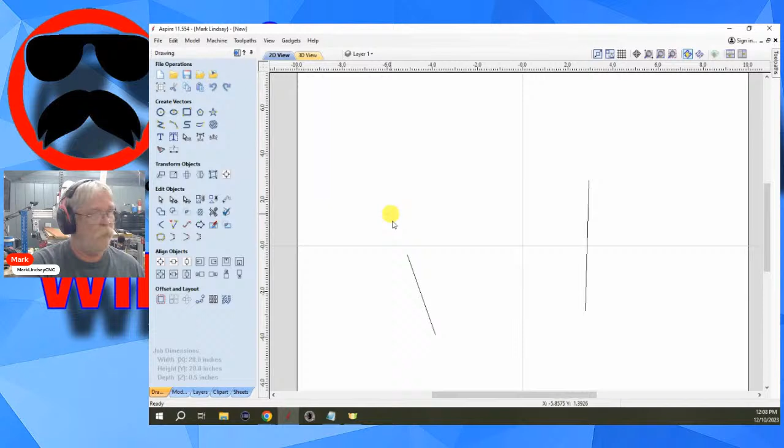I had forgotten all about the bounding box issue. Still no word on the bug. But now, today, what I wanted to talk about was some of the trim tools that don't get a lot of love.

John asks, but is it rotating at 88.5 from the angle it was at? No, it's rotating the bounding box around the vector, from that angle to 88.5.

But that's the point. At 26 degrees, if you rotated another 62.5, it will rotate the bounding box that 62.5, but not the vector. So that's something we're going to have to work with.

All right, today I wanted to get into some of the trim tools that don't get a lot of love and don't get a lot of explanation. Those are located - we all know where the interactive trim tool is, the pair of scissors out here to trim vectors in one way or another.

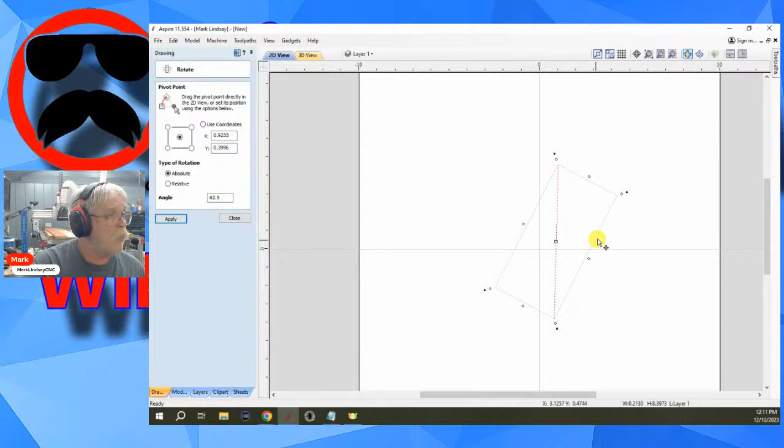So yeah, you can take whatever you're at. Now, just let me Control Z and make sure that I did that right, that was an absolute rotation - 62.5, and I didn't have relative checked. And it rotated that bounding box to 62.5.

Let's double check. I think you may have found a workaround. 88.547, that's close enough. I think that would work. So, all right, there's a workaround.

Now I know why I always use relative and never absolute. Well, whatever works for you. I would really suggest looking at selections that have more than a single straight line. You don't have to wait for me, but feel free to try several vectors and see if that works for you.

But just remember that it's rotating that bounding box around the vectors, it isn't rotating the vector itself. But as Brandon just pointed out, subtracting the angle it's already sitting at from the angle you want did work.

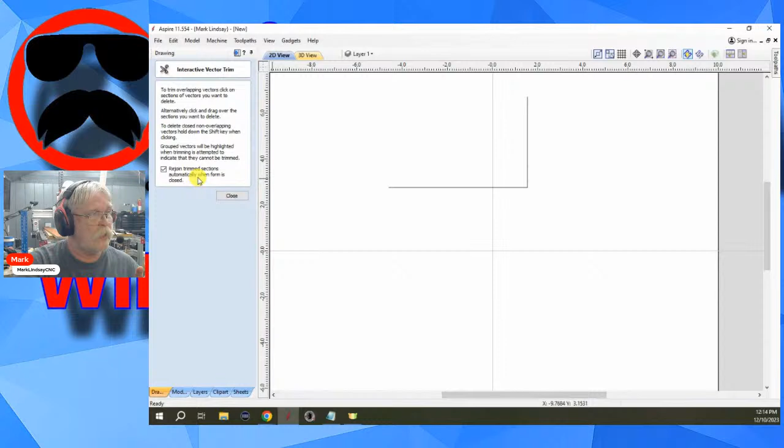Now, if I want to trim this vector to this one, I can just trim down here. Because I have this box checked - rejoin the trim sections automatically when the form is closed - since I've trimmed away this vector out here and this vector down here, it's going to join these two into one open vector. I'll click close. Now when I select this out here, it selects the whole thing. And if I go into join vectors, we can see I have one open vector - it did take those two separate vectors and joined them.

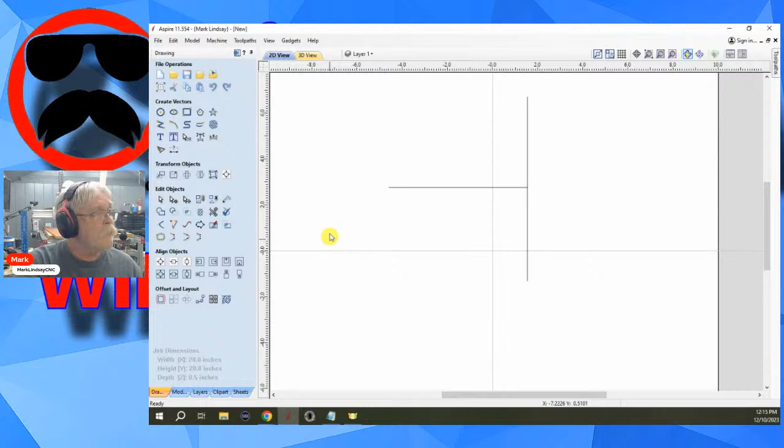Now if I Control Z that last cut and select them both, we can see I have two open vectors. Again, you cannot join one vector to another unless you're at a start point or an end point.

So that's the most basic trim tool that most of us are familiar with. But now we have all these over here.

You may or may not be familiar with the weld tool. Welding comes in real handy when you're working with script fonts, and you want to connect letters together so that it looks like it's all one piece rather than separate letters. That's a good case for a weld tool.

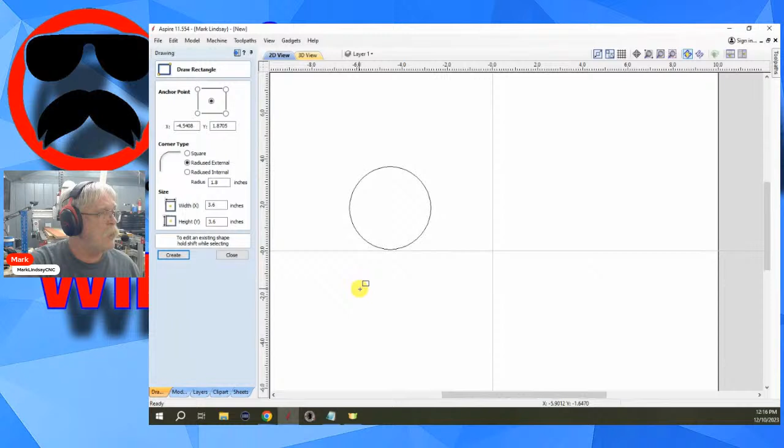Let's use their diagram here, and let's go for a circle right about here. And we'll go for a rectangle. No, that shouldn't have been selected. We'll go for a rectangle. Let's just go ahead and create that.

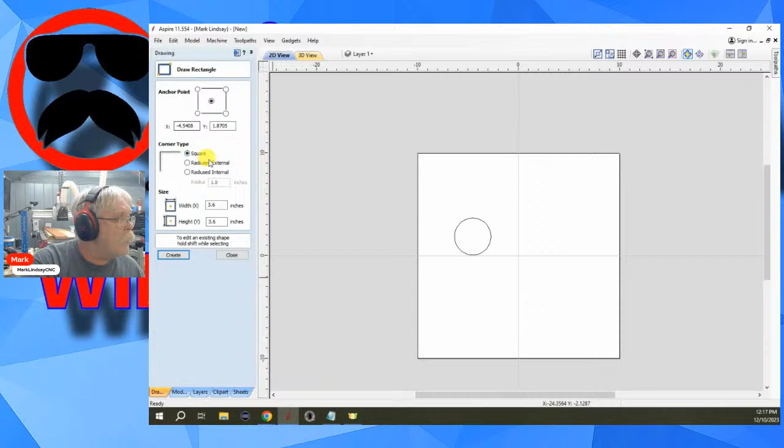Where did it put it? Let's create whatever that says. Close. I don't see the rectangle. Where's the rectangle? I want to go with a square, 3.6, 3.6. We'll create it. There we go.

All right, but now I want a little bit of an overlap here, and I want to weld these two together. Well, what I can do, I can take the scissors and I can trim that away.

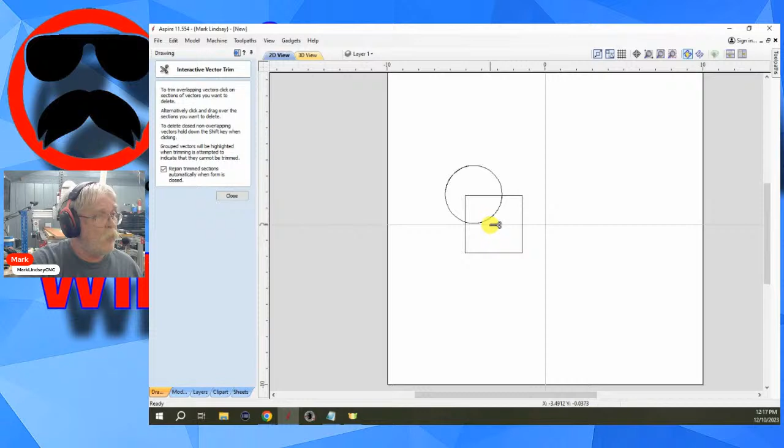What happened? How come I've got more than one? Somehow I ended up with more than one circle out here. Okay, let me clean up my mess here.

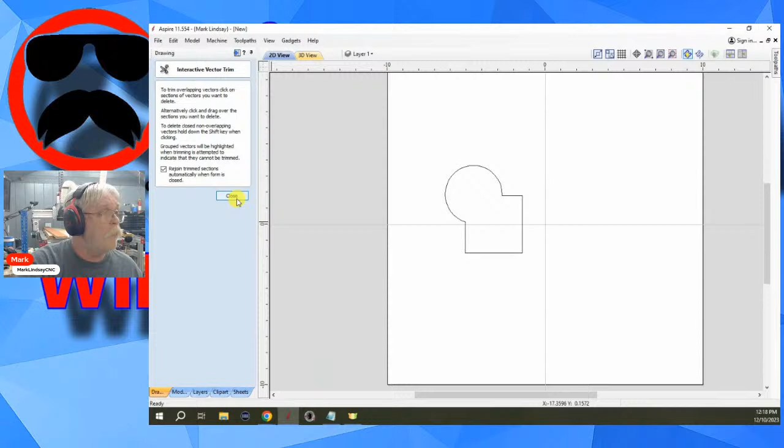There. All right. Now I can take my scissors out here and I can trim those away. And that's real easy, and it's already joined. Or close, Control Z, Control Z, Control Z.

Or I can just select them both and weld them, and that will do all of that for me with one click. Okay.

That's, again, whoops, Control Z. That's pretty useful when you're talking about using script fonts to attach them all together so that it's one continuous piece and not a bunch of letters connecting, laying over the top of one another.

And that's fairly common, but we have 3 other trim tools that are not very common. And that is subtract and overlap.

Now I'll get into those in a second, because I wanted to go to another one that I have found very useful, and that is trim selected objects to the last selected object.

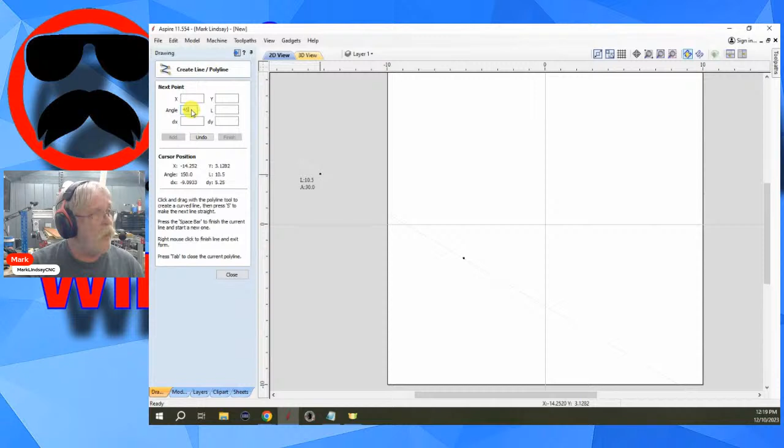So for that, let's play around a little bit here, and I'm going to do a start right there. And for my next point, I want an angle of 45 degrees, and I want the length to be 4 inches long. And I'll add, so I've got my line here. It's a 4-inch line at 45 degrees.

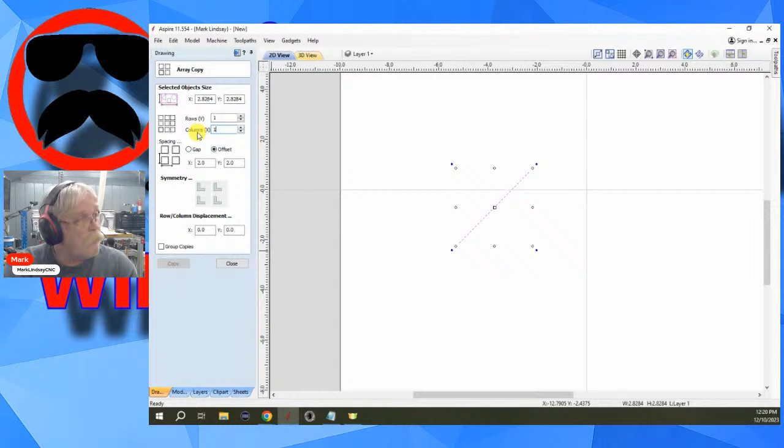Now I want to copy that on a linear array, so I'll select it and come over here to Array Copy. I want 1 row in Y, but I want 10 columns in X. I want 10 lines across. And I'm going to go with an offset of a half inch, so 0.5 and 0.5. Actually, I don't need anything in the Y, but this'll work.

And I want to group the copies just for this demonstration. Now I'll back out and I'll copy. So now I have 10 lines spaced a half inch apart. I'll close that.

Now I want to copy these. I want to make a copy of this group, flip the other direction. So I'll come over here to my mirror tool.

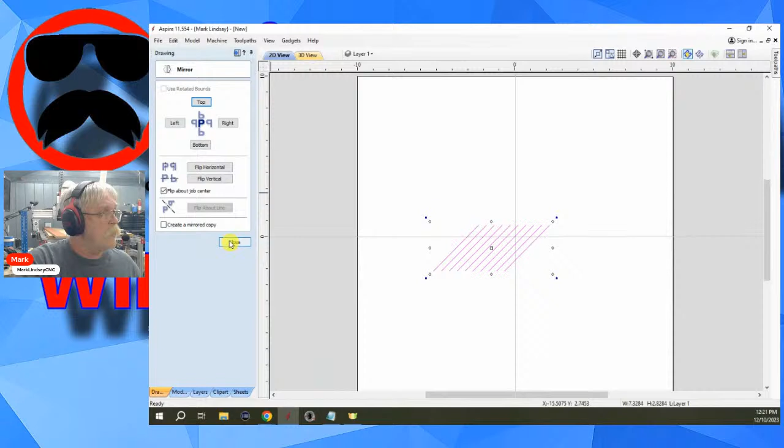And I don't want to flip it about the job center. Yes, I do. Let me close this first, and I'll select these, and let me center that up.

There we go. Now I do want to flip it about the job center. Nope, not rotate, mirror, wrong one. There we go. I want to flip it about the job center. I want to create a mirrored copy, and we'll just flip horizontal. Close that. So now I have this crosshatch pattern here.

Now let's take my measure tool, and I'm going to come up here, start right there, and I'm going to come straight down. What is my measurement there? 2.82 inches. Okay, that's fine.

I'm going to make a 2 1/2 inch circle right in the center. So we'll go over here to my draw a circle tool, and I will go, I wanted X0, Y0, and I want it to be, what did I say, 2.5, 2.5. And I'll create that circle.

Now what I want to do is I want to trim all of these vectors away outside here, but I want these vectors left inside the circle. So what I'll do first of all is I'm going to select both of these groups, and I'm going to ungroup them so that I have separate vectors.

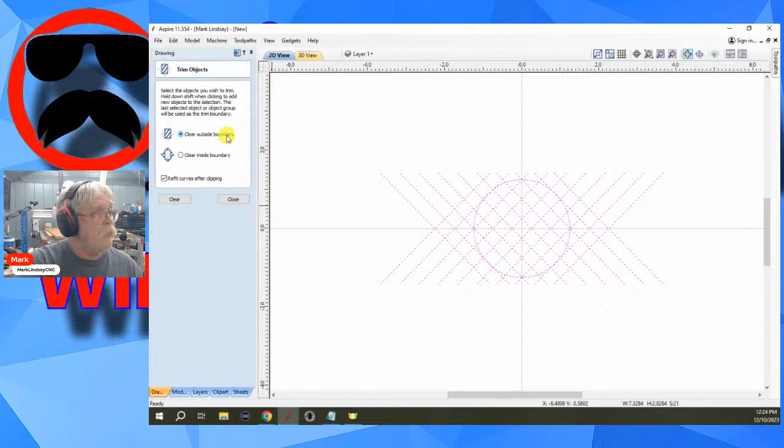And I want it to refit the curves after clipping. So I'm going to clear outside the boundary, and I'll click clear, and it trimmed all of those vectors to this outside boundary.

It's a one-click solution. This is a very easy way of adding a little bit of detail. Okay, AL Peleg is asking, won't it work when they are grouped? Well, let's find out. Let's see if it will work.

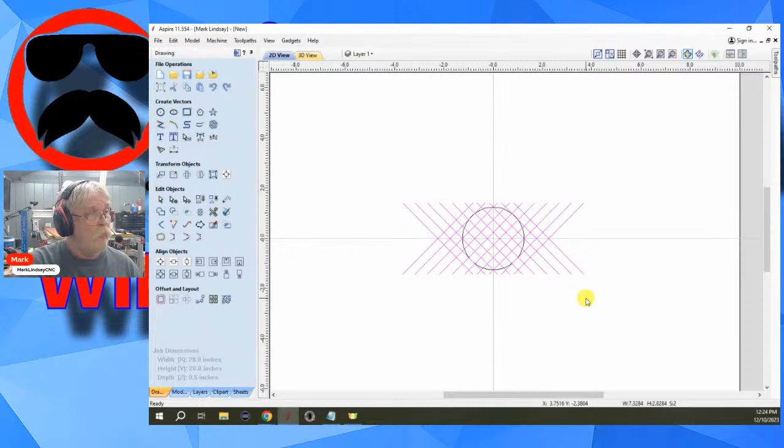So I'll Control Z, let's go back over here. Control Z the trim, Control Z the ungroup. So now I have these two grouped. See, I normally don't work with grouped vectors. I'll hold down Shift, and now let's go look.

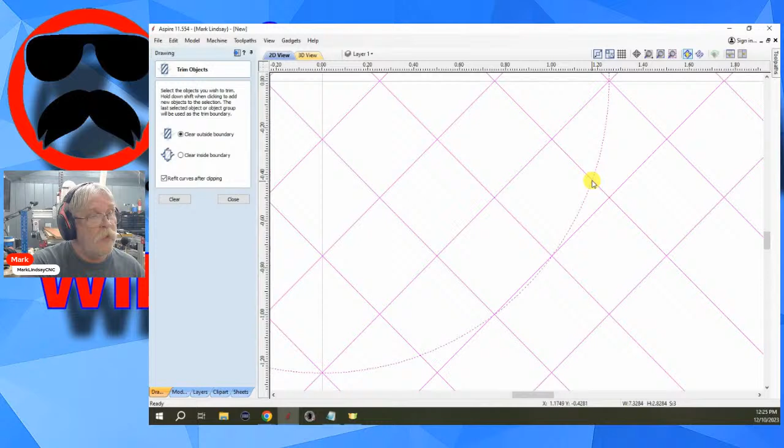We'll clear the outside boundary. What the refit curves after clipping does is, if any of this is joined, it will refit that join and make sure that it is joined after the clip. So for instance, if these were joined squares, after they are trimmed to this vector, like right here, let's focus right here. If this was a joined square, after the trim, it would project the vector along this to join this and make this a complete closed vector. That's what the refit is.

So let's see if this will work. And it did work. It automatically ungrouped them. And again, you can tell that simply because they're dashed lines, they're not solid pink lines. So now if I want to group those, I can go ahead and tap the letter G on my keyboard, and now they are grouped. So if I click off, I can come back and select just one.

And it selects all of these vectors. Generally, I don't like to work with grouped vectors because there are some actions that can't be performed on groups, right?

For instance, just a simple for instance, if I'm looking for open vectors and I come up here to selection, select all open vectors. Oh, okay, it did it in the group. Wow, that used to be a big thing. If you selected all open vectors and it was in a group, it would tell you there were no open vectors. Evidently, they have since changed that. So now it will tell you when you have open vectors within a group.

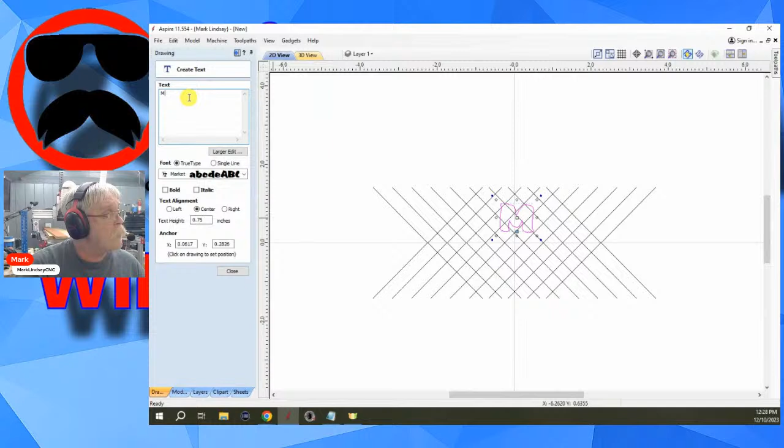Let my font list load, I've got an extensive font list. Let's go with Market. What the heck? And I'm just going to put my initial out there, capital M, close, and now I'm going to resize that.

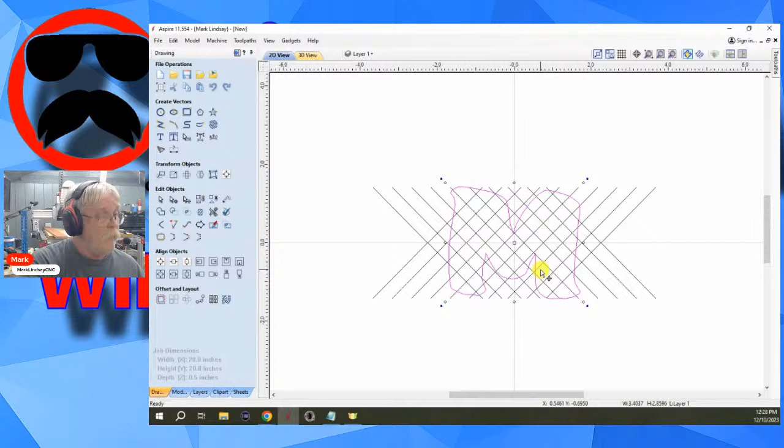Bring that down. Oh, nope. Come on, you can do it. There we go, bring that down inside. Yeah, there we are. And now it's a little bit too big, it's going outside of our cross hatching. And we'll center that up in the middle. That looks okay, it's got everything all set.

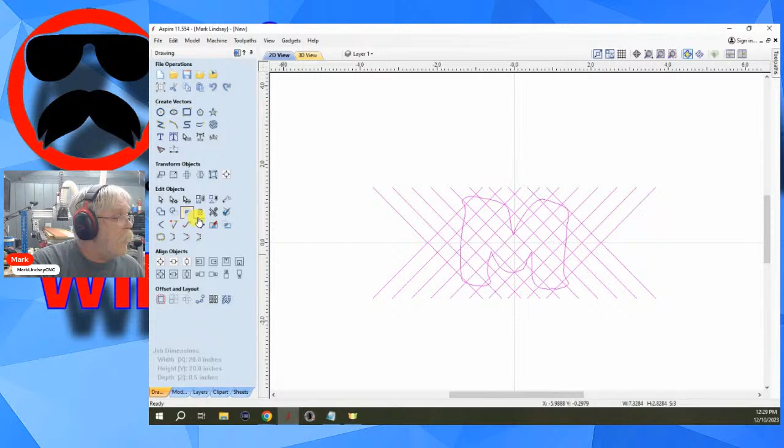So now I can select these, hold down Shift, and I can trim everything outside of that, refit curves after clipping, and clear. So now I could come along with, say, a 15-degree V-bit and clip and carve very shallow, and have that little extra detail within that letter M. So, okay, that's just one example.

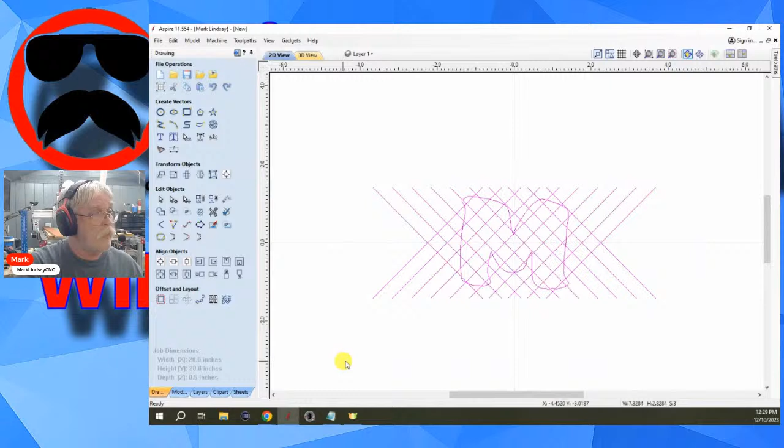Let's see, now we have the subtract, let's play around with that a little bit. Let's delete that, we don't need that anymore. And I'll zoom back out here. Let's say for giggles, I'm going to do overlap first, because when I go to do subtract, I'm actually going to design a piece that I will be cutting. Not today, not on the live stream, but I will be cutting it eventually.

The overlap, let's say you want to create a circle out here that is 4 inches in diameter. Create. But now you want to split this into 4 quadrants. It's easy to come along here and draw a vector, spacebar to accept that line, come over here and clip and spacebar.

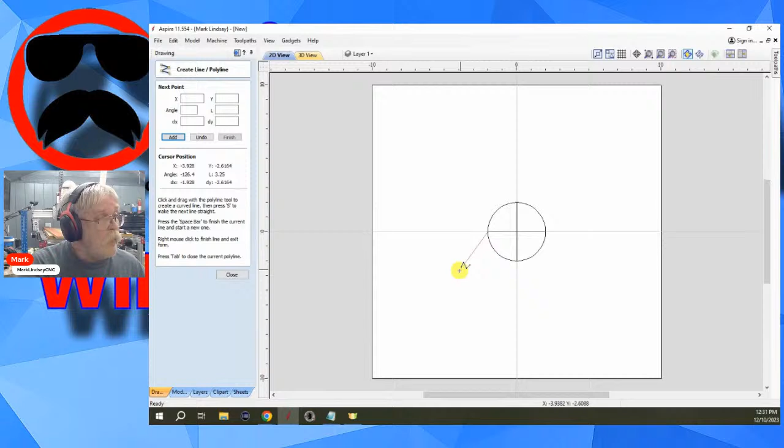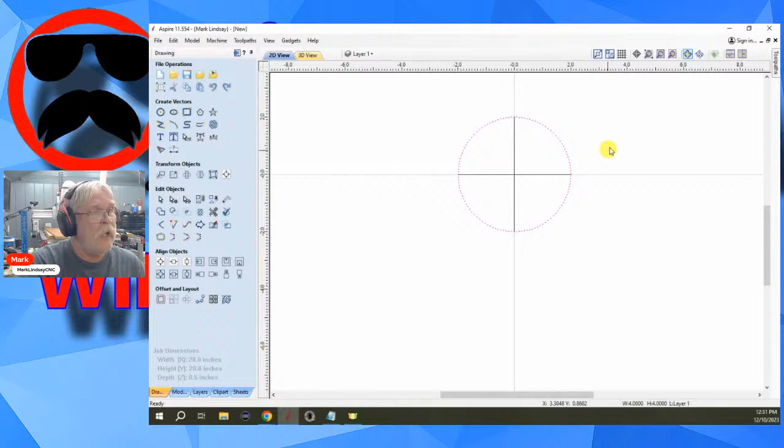But you have a drawing of 2 vectors within a circle, but that's not making this into 4 separate vectors. Now, yes, you could...

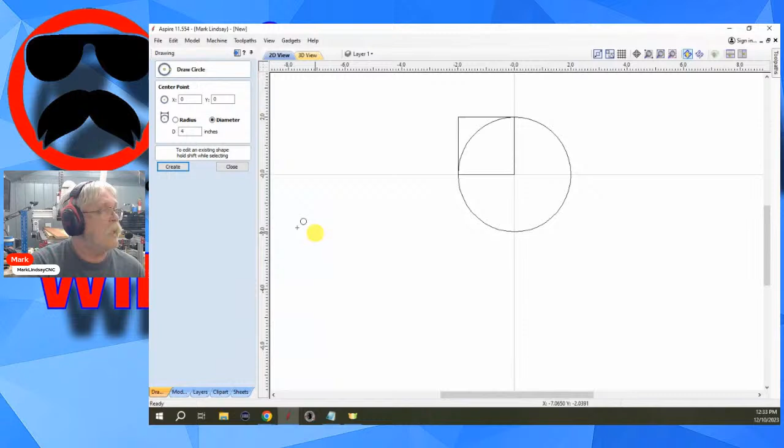All right, so I've created a 4-inch circle. Excuse me, they said there'd be no math—they lied. Okay, so what I have is an overlap: a 2-inch square and a 4-inch diameter circle. This 2-inch square represents 1 quadrant of that circle. Now where these two overlap, this area right here, that's the quadrant I want to keep.

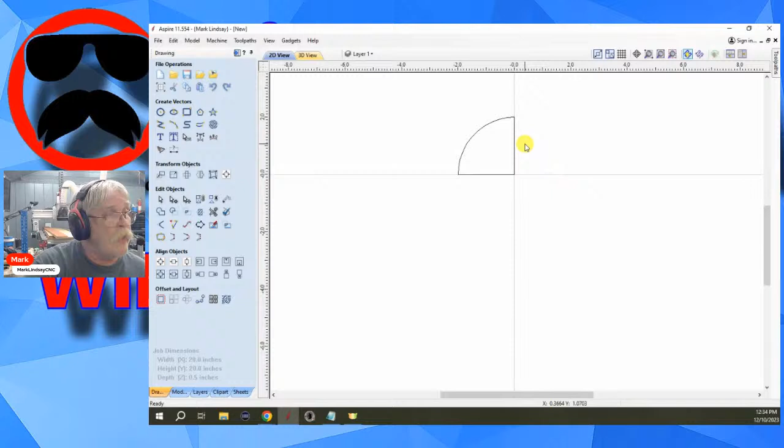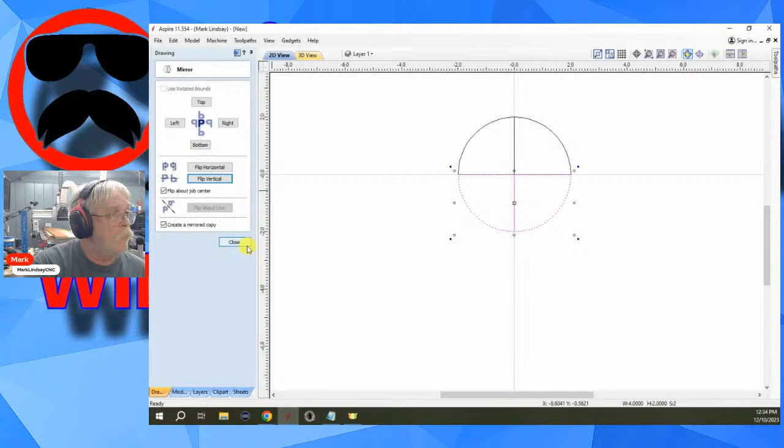So I'll just select both of those vectors, come down here to 'keep an overlap of the selected vectors', click on that, and there's my first quadrant made. So now all I need to do is select it and mirror it. I'll want to flip about the job center, create a mirrored copy, flip horizontal, and now I have half of my circle. Select them both, no changes to my settings, flip vertical, and there is my 4-inch diameter circle split into 4 quadrants.

Venn diagrams for everyone in vectors, no less.

Yeah, well, there you go. It's a simple way of, let's say, if you wanted to V-carve this quadrant and that quadrant, and make these an epoxy fill in blue. So you have this color or this one, and you could V-carve these to a flat depth of 1/8 of an inch, or about 3 millimeters, and pour those blue.

Then you could select this vector, hold down shift, select this vector, and V-carve those down to about 1/8 of an inch and pour them white. Then you could select all of the vectors, put a 30-degree V-bit in it, and have it cut down on a profile toolpath to about 1/16 of an inch deep, 1.5 millimeters, carving on the vector, and pour that black. And you would have a BMW insignia.

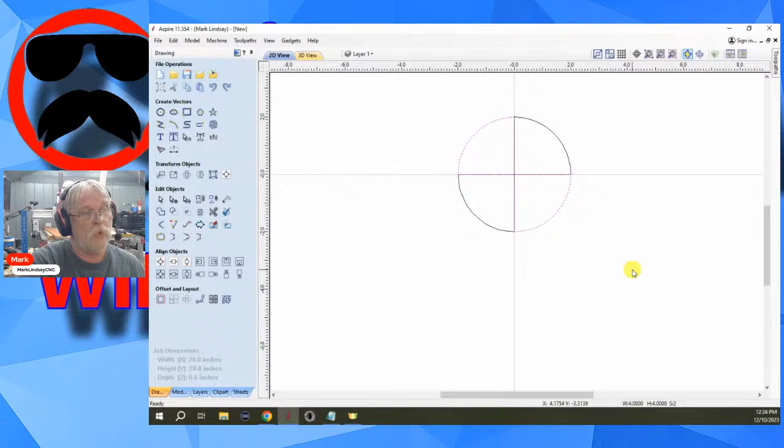So there's that. It's an easy way of using the overlaps to create a quadrant of a circle, and it doesn't have to be a quadrant. But if you were attempting to do something like that, it would save a lot of making extra layers. Now, personally, I would put these all on separate layers—maybe the two that I was going to carve blue, I would put on a separate layer from the ones I was going to do white. But that's where we just get into organization. It's making the separate vectors without having to go in and do a lot of unnecessary trimming.

Now, when it comes to the subtract, it's also a very simple operation to do. But I've decided that what I'm going to do is go ahead and actually design a pattern. I'm going to create a tool.

You probably can't see, but back on the CNC router, because they're both white, I have a 20-inch by 20-inch piece of 1/2-inch thick HDPE—about a 12-millimeter thick piece of HDPE plastic that is 20 inches square, about 508 millimeters square and about 12 millimeters thick.

Now, what I want to do is make a caddy that'll fit down inside of my pressure pot. I've got this big old 10-gallon pressure pot where the top opening is 17 3/4 inches, which is—let's see—17.75. That's about 450, not quite 451 millimeters wide.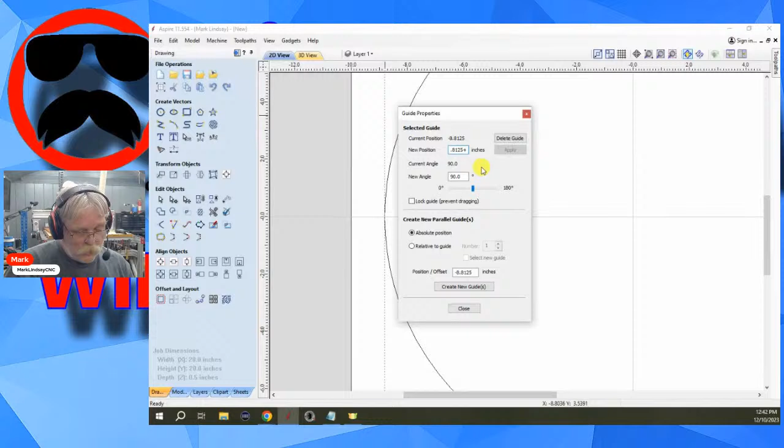I'll right click on that guide — its current position is -8.8125. I want to add 2 inches to that, so the guide moves 2 inches in from where it is. Under new position, I'll click in that box, cursor after the last number, say +2, equals, and it gives me a new position. I'll click apply. That guide has moved 2 inches in to the right — it's a positive number because it's moving right.

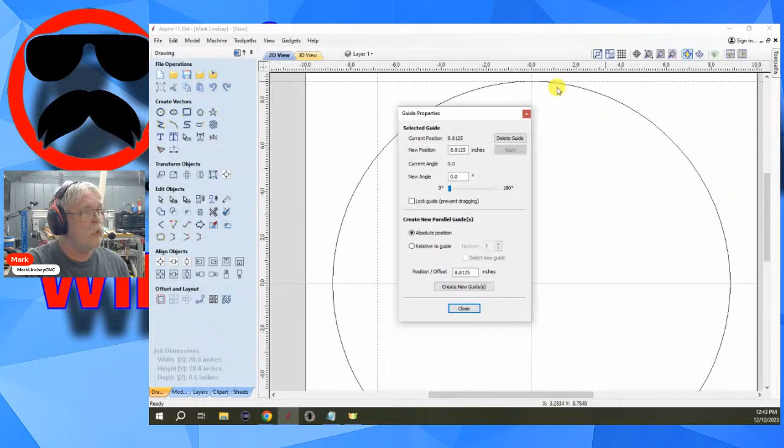Similarly, I'll come down here and put a guide right there. I'll right click that guide, and now I want to move in the negative direction, so I'll do the same thing except say -2, equals, it gives me a new position, click apply, close. Now I have a guide 2 inches in from this end and 2 inches in from this side.

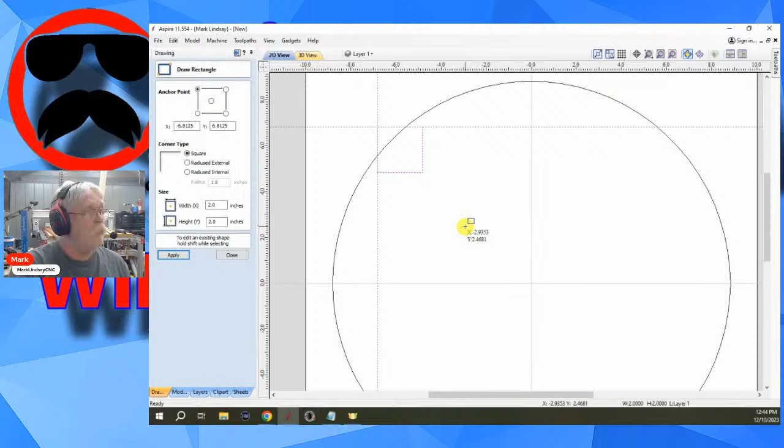So now I'm going to draw a rectangle. I want to anchor it at this point, the top left corner, and make it 2 inches by 2 inches. I'm going to click right there — now that just clicked.

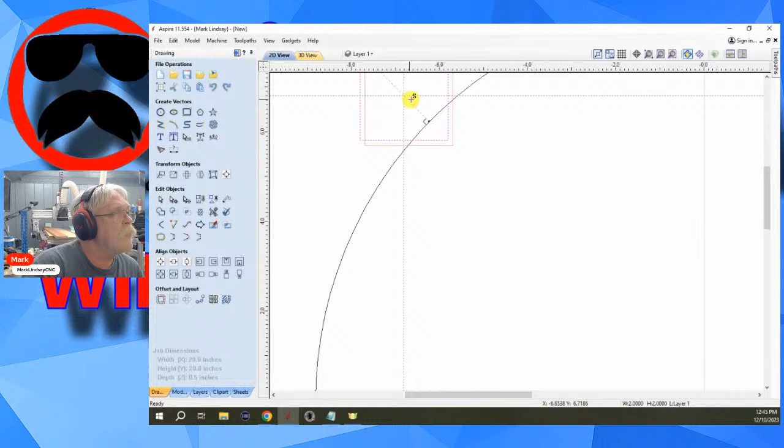That may be too much — or not enough rather. No, I don't think I like that. I don't need much more than 2 inches, however, so maybe I didn't need those guides. Let me drag it out that way — that's not enough. Let me move it to where my center is on that guide... that's not enough. I think that's about right. So I didn't need those guides after all.

Let me scoot this over so that it just about splits — there we go, that's about right there. So let me delete that guide, I didn't need those guides.

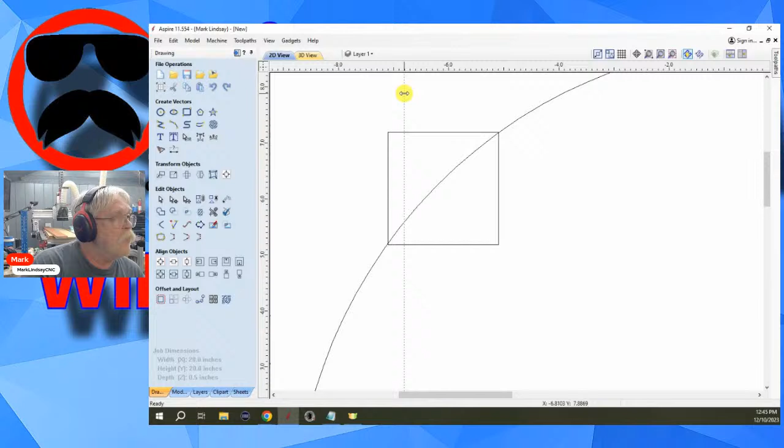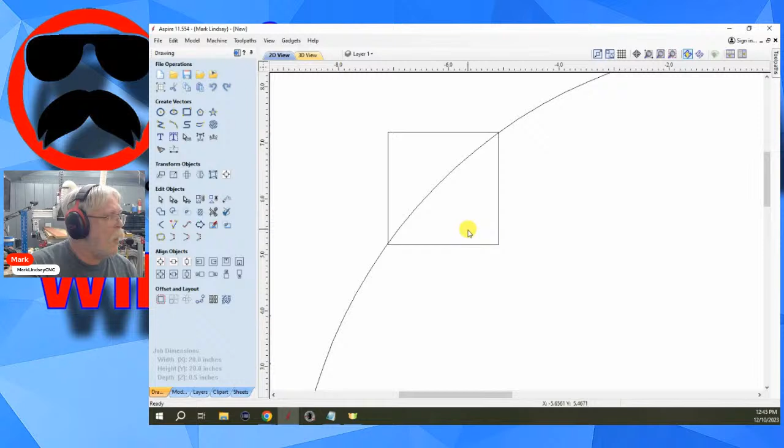Delete, okay. Now I made that square with square corners, but now I want to fillet this corner because I want a nice radius here. I'm going to be cutting this out with a 1/4 inch bit, so I want to put a 1/4 inch fillet. Let me change the radius of my tool to a quarter inch — where'd the 8 come from? Must have hit two buttons at once. I want a normal fillet, and I'll come down here and do that.

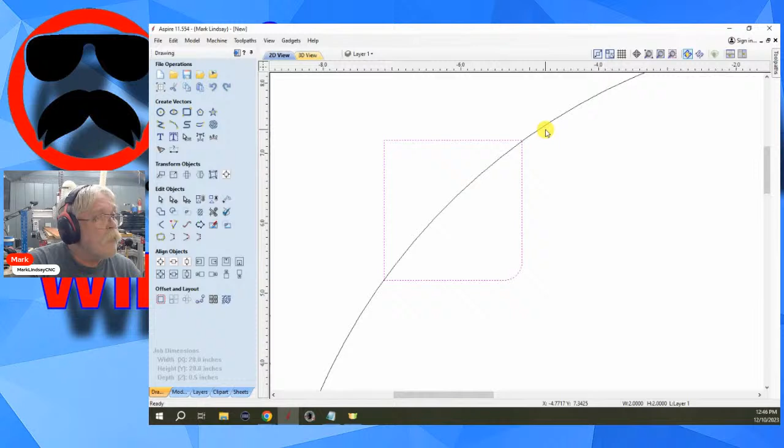I've got something bothering me here — yeah, that's what I thought. Let's scoot... come on, scoot... and that's fine, okay. So now I've got that one rounded corner. I've got my circle, I've got my square.

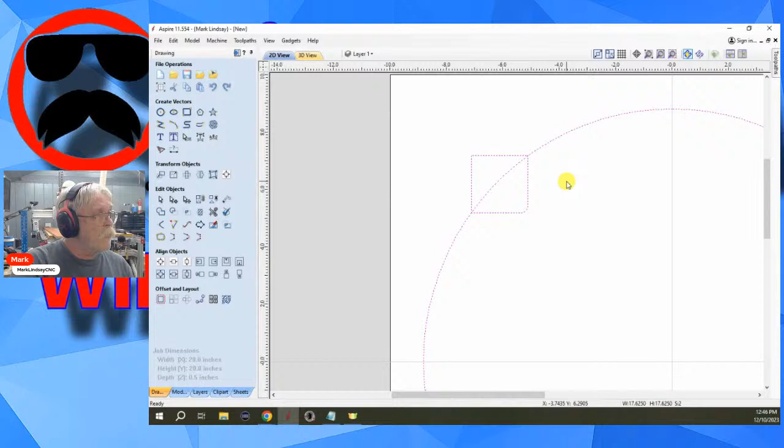So now I want to subtract this from this. I'll come over here — nope, that's the wrong way. I want to select my circle and subtract the square from it. So select my circle, then select my square, then click subtract, and there we go.

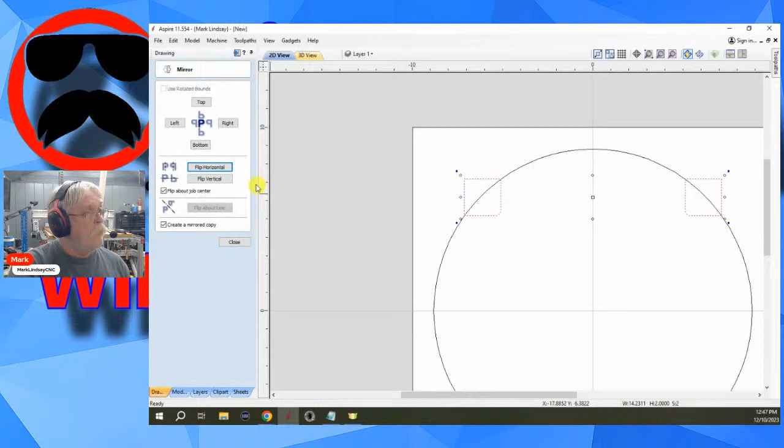So that's the first one, and this is what happens when I go live. I need to Control Z that because I need one on each corner. Let me create a mirror copy, flip about job center, flip horizontal. There's one there. Select them both, flip vertical. Now I have 2 down there. Now I can subtract.

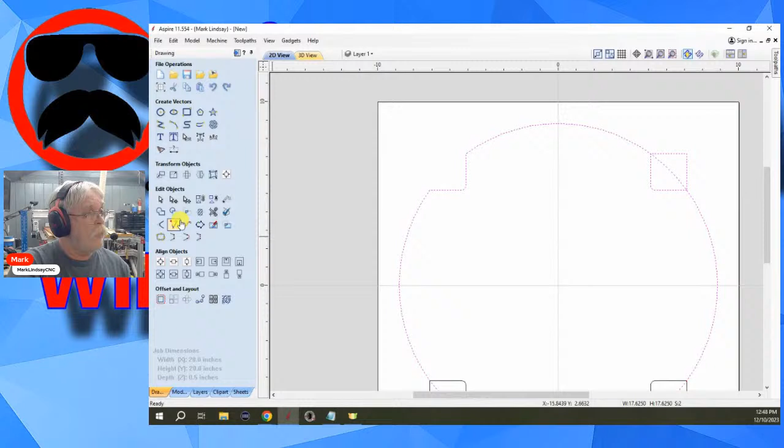Now, the instructions on the subtract tool are specific. I can't select the circle, then select all of these squares. What I can do is select the circle, then subtract the square from it. Then I have to select this square and subtract from it. Then hold down Shift, select that square and subtract from it. Hold down Shift and subtract from it. Now I have my 4 cutouts.

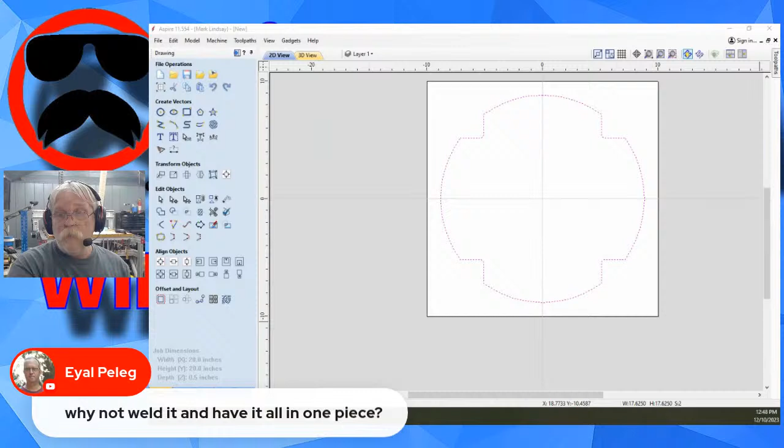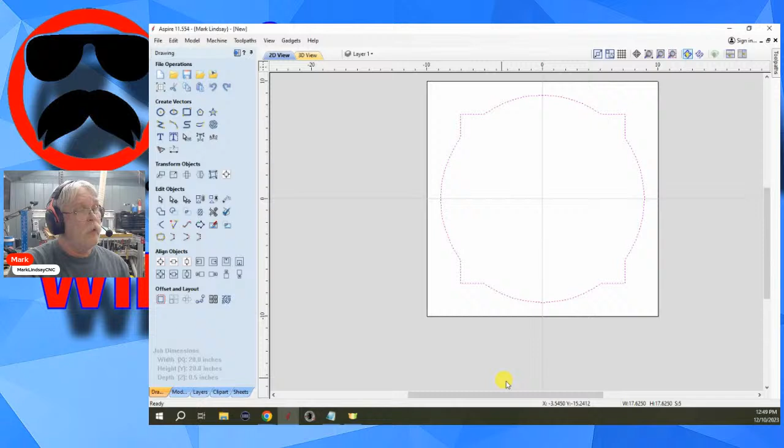Now, Eyal is saying, why not weld it and have it all one piece? That is one piece. That is one closed vector. It is one closed vector. Now, to your point, however, let's Control Z all of those. Now let's select everything and let's weld. That's why. It doesn't know what you want to weld. It doesn't subtract the one from the other. It groups them together based on the outside.

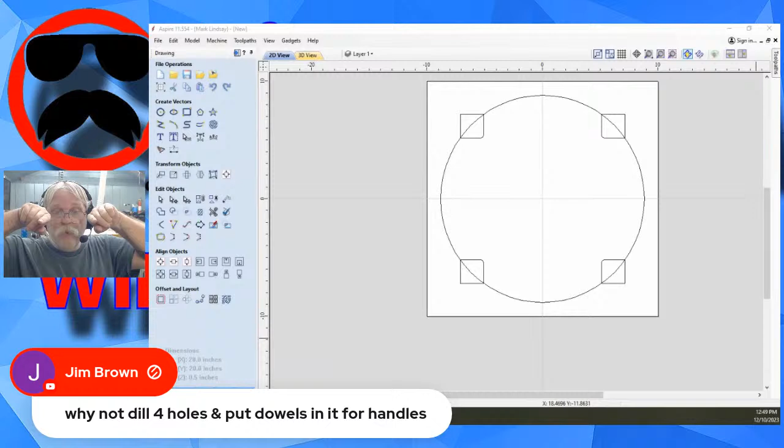So we'll Control Z. And now let's see. Why not drill 4 holes and put dowels in it for handles? Because then I've got to somehow attach the dowels to the HDPE. And I don't know if you've ever tried to glue anything to HDPE. Doesn't work. And I don't have a flat bottom.

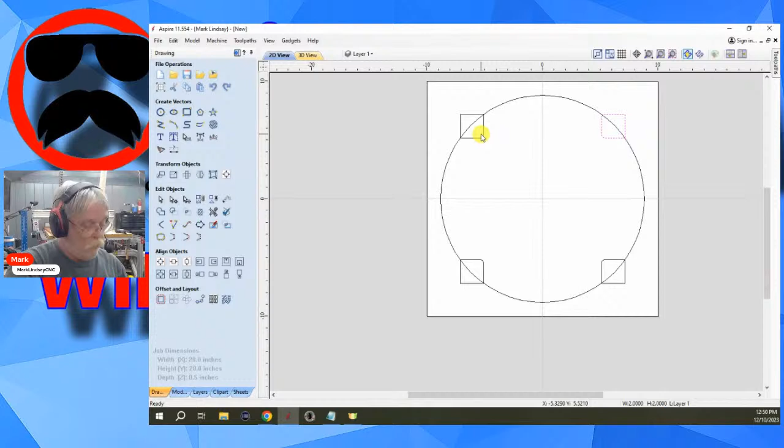So let's see. No, I wasn't trying to add them, Eyal. I was trying to subtract them. Yeah. Now, the suggestion there is to group all 4. And we'll grab this one and that one. Let's group them. And we'll take this circle, hold down Shift and select the group, and we'll go down here to subtract, and it does work. Okay, you can subtract the group.

All right. Now, let's see, do we still have one closed vector? We do. Okay, so you have one closed vector. Yes. So yes, that will work, guys.

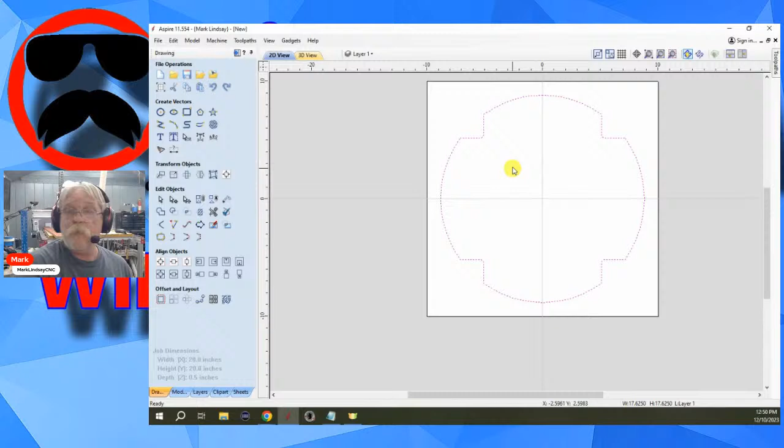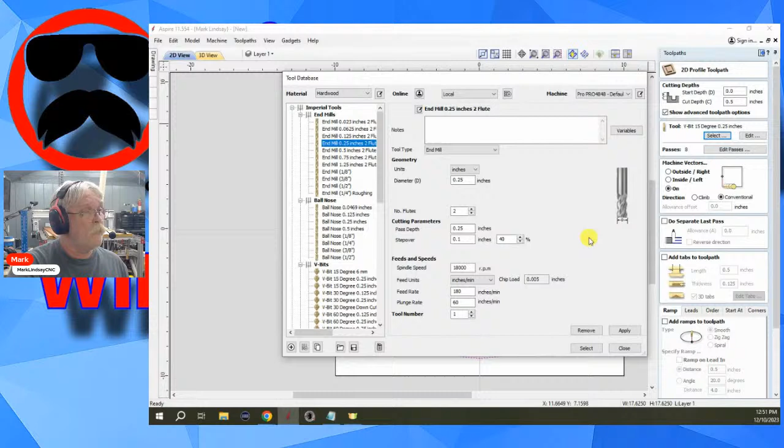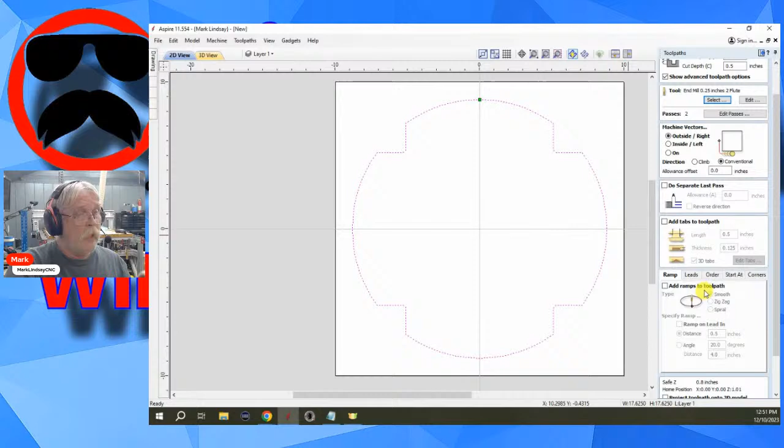Great. So now what I can do is I can cut this out, go over, and we'll just select that, do a profile toolpath. I want to cut all the way through, Z equals, and I want to use a 1/4 inch end mill. And I'll select that. I want to cut to the outside. For this, I'm not going to do a separate last pass. I will add tabs, but not for this demonstration. For this demonstration, I'm not going to add the tabs. Won't use any ramps or leads or anything.

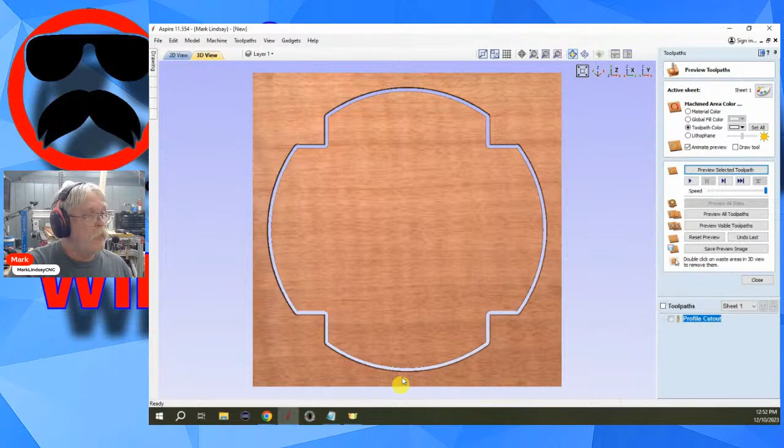And I'll just call this profile cut out. Calculate, and I'm going to change my material. Well, no, I'll go ahead and leave it that just so you can see it. I'm not going to play around with it. I was going to make it all white, but no, not going to worry about it. Now that'll cut that out, and now I have a tray, a caddy.

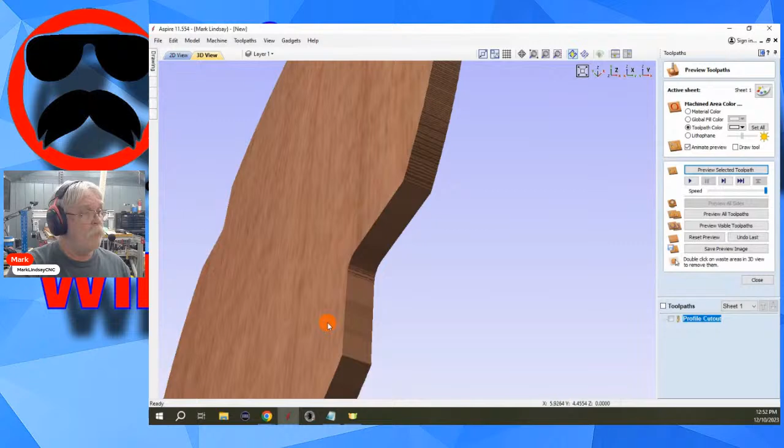And what I can do is come over here and drill a hole, tap it, drill another hole right here, tap it, and then screw my plastic strap into the edges and hold on to it.

Maybe cut small grooves to put in nuts for the screws. Not necessary. Really not necessary, I don't think. I've never seen them with threaded inserts. I've never seen them with any kind of nuts or bolts.

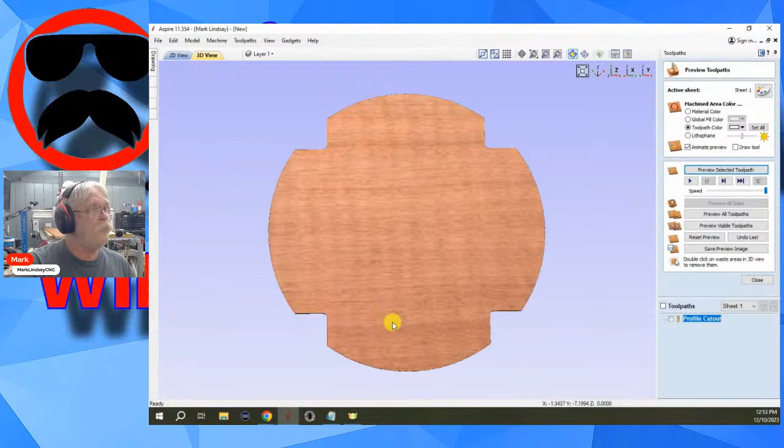It's basically, you'll see it when I actually do it. But basically it's just going to be a platform for me to put large molds on here and be able to drop those molds. And they won't be going far. I'll be doing the actual pour up here. I'll pour it on the CNC sitting on that caddy, then drop it down inside. And then, so it's not going to move very far.

But I don't think it's going to be all that necessary to use nuts. I did consider it. Cut a small groove down in there to put a square nut inside and then be able to screw. I just don't think it'll be all that necessary because it's not going to be holding that much weight.

So grooves might be an alternative for people that can't thread the hole. If you're using a machine screw, it may thread itself. It may not. But I do have 1/4 inch, 20 thread per inch taps.

So, but yeah, your point is well taken, AL. Your point is well taken. There are people that don't want to thread plastic, and that's well and good. You certainly could cut a small groove in there, just enough to press a square nut down inside of it. And I would use a square nut. I don't know that I would use a normal hex, because it's just enough to where the plastic could deform enough to let that nut spin.

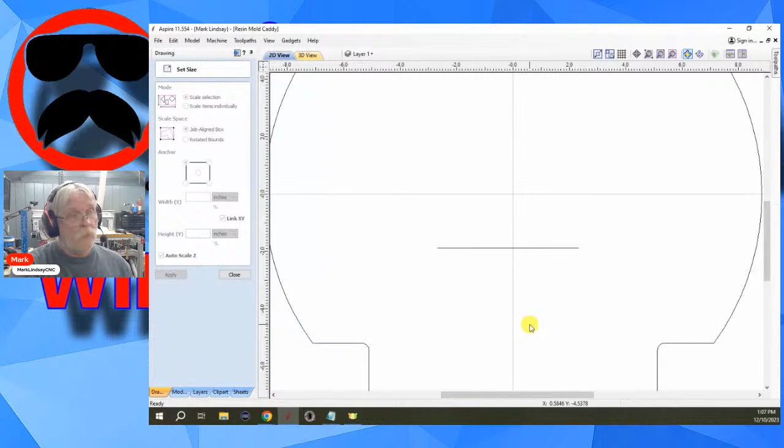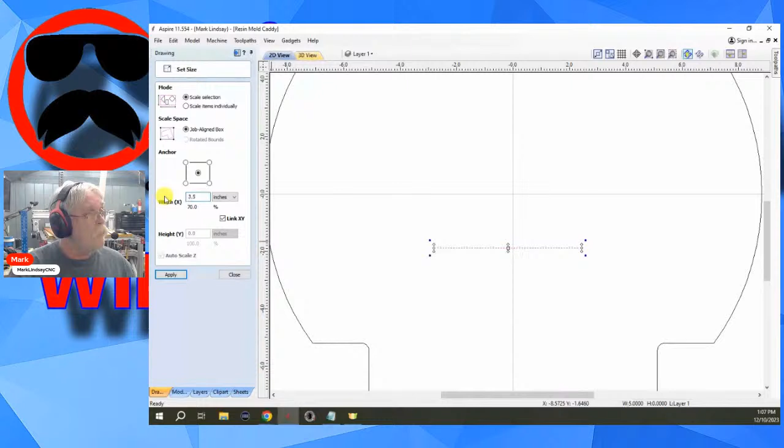Now if I want to make it a specific length, I'll go back into set selected object size, and it doesn't matter if the endpoints move. I'll just click the center to keep it right there in place. And I'll set it—I want it to be 3.5 inches long. 3.5. Click apply, and there it is.

So that's trimming, that's extending, and that's resizing in total. I hope that answers that, Michael Hall. I hope that answers that.

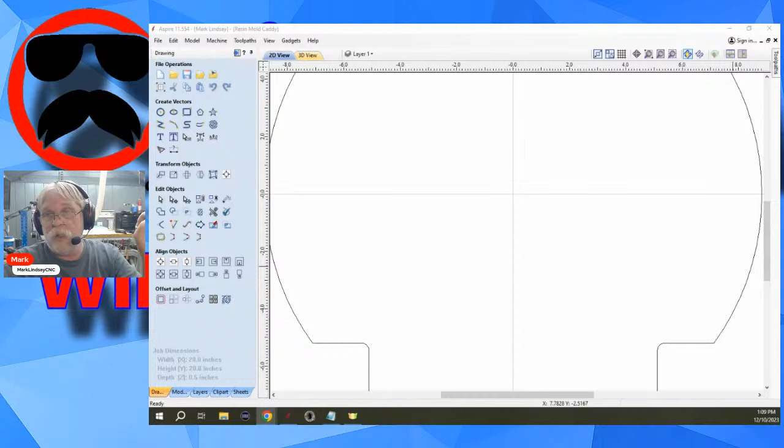Ayal is asking, is it just pressure or is it heat based like when cooking? No, it is not heat based, it is just pressure. The reason for a pressure pot is to compress any bubbles in the resin to the point where you cannot see them. It compresses them so small—the liquid will not compress, the air will. It compresses them to where they're no longer visible, and then the epoxy cures. Then when you release the pressure, the air has nowhere to go, it can't—that bubble can't expand. There's no heat involved with the pot itself. The curing process, the epoxy curing process, does create heat. So it's simple pressure.

It is a special pot. Let me show you, don't know if you can see it, probably not. I'll put it up on my CNC next week, but this is a heavy son of a gun. The shipping weight on it was 76 pounds, so this is not a rinky-dink piece of equipment.